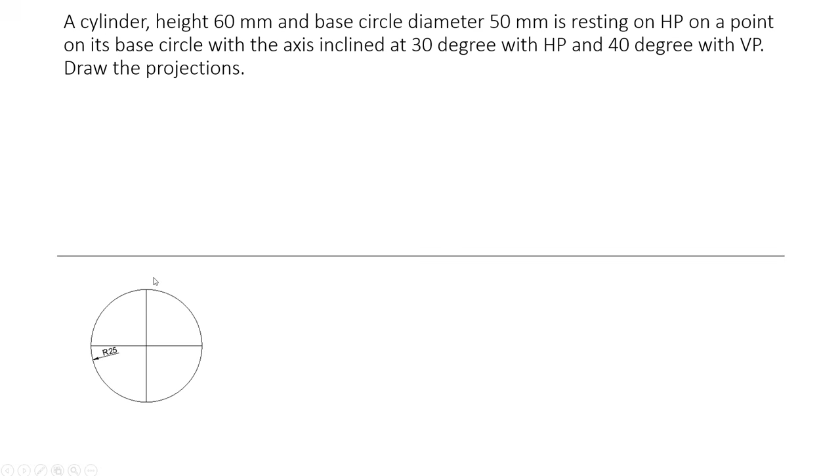So since it is a cylinder, the top of the cylinder is a circle. Draw the reference line, draw a circle of radius 25 mm. Do the dimension. Now draw the horizontal and vertical diameters parallel to and perpendicular to this reference line. Always these two lines should be parallel and perpendicular to this reference line.

Now you also want to draw lines at 45 degrees. So from here you just mark 45 degrees like this, and from all these horizontal and vertical lines, draw lines at 45 degrees so that you can divide the circle into 8 divisions.

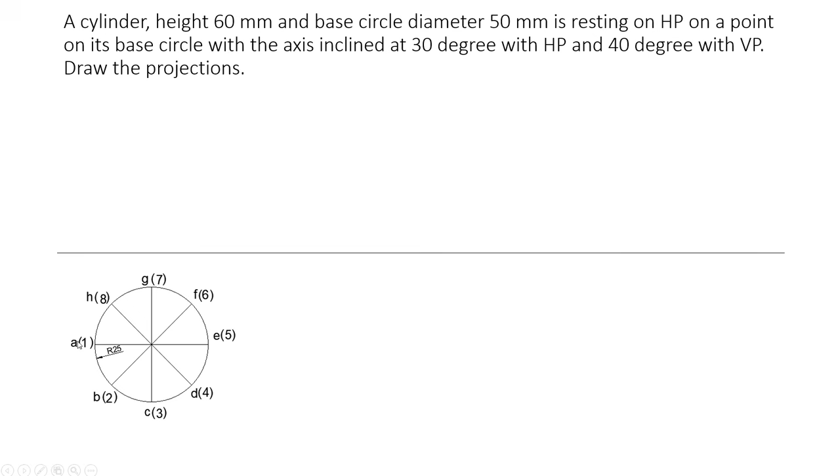Now name those points as A, B, C, D, E, F, G, H and 1, 2, 3, 4, 5, 6, 7 and 8. Here A, B, C, D, E, F, G, H, which are the points outside the bracket, are the top face points, and the points which are inside the bracket are the corresponding base points. Since those points are invisible in top view, those points are inside the bracket.

Now project all these points to the reference line. Since the height of the object is given as 60 mm, from here you mark 60 mm upwards. To show the axis you want to use chain line. Now from all these points projected here, just draw perpendicular lines to that 60 mm line.

Here do the dimension 60 mm. A, B, C, D are top points, so this will be the point A dash, and the second point will be B dash and H dash here, this is C dash and G dash, this is D dash and F dash here, and this point will be E dash. Now these points are outside bracket here.

Now to mark the base points you have to consider the points which are inside the bracket. So here it is 1 dash, this is 2 dash and 8 dash, this is 3 dash and 7 dash, 4 dash and 6 dash and 5 dash.

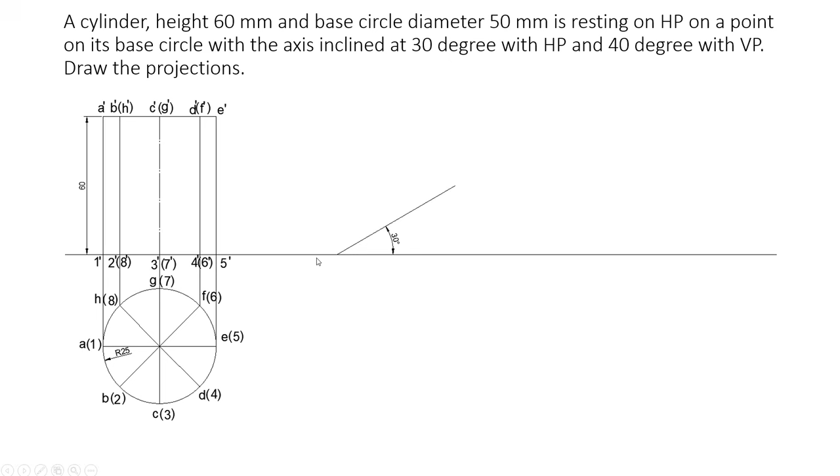Next, since it is given that the axis is inclined 30 degrees with horizontal plane, the axis and this slant generator are parallel, so inclination of the axis means inclination of this generator. So you can just mark a point here, and instead of marking the axis you can draw this line. Since the axis is inclined 30 degrees, this line is inclined 30 degrees.

So from here you mark a 30 degree line having a length of 60 mm. Mark a point and draw a line at 30 degrees having a length of 60 mm. Now also draw a perpendicular line to that line. Now parallel to this line you want to draw a line like this, and parallel to this line you want to draw a parallel line like this. So you'll get a box.

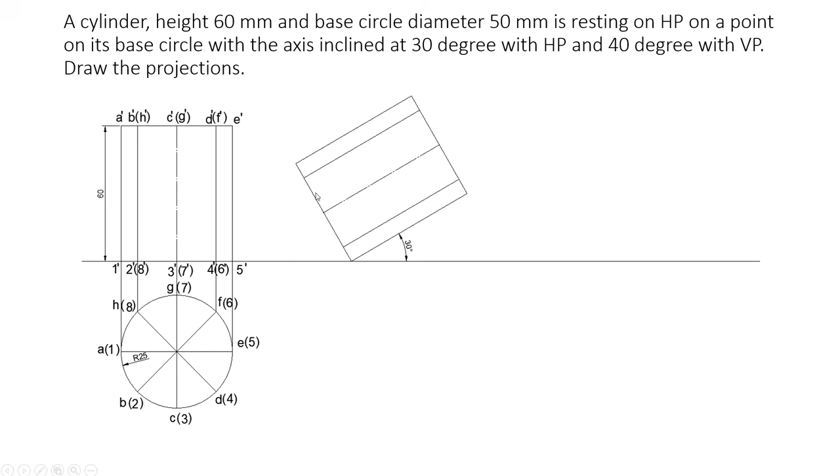Now you want to mark all these small dimensions from here to here, here to here, like that. All those dimensions you mark here. So you can get this axis and the remaining generators. Now all those points you want to name with the same name but with suffix 1. So 1 1 dash, 2 1 dash, etc. on the base points, and A1 dash, B1 dash, etc. on the top face points.

Now to get the fourth diagram, you want to draw the projection lines parallel to the axis through all these 8 points like this.

Now from all these points here you just draw vertical lines to the corresponding line. Here you have E1 dash, so E1 dash to E, then A1 dash to A, B1 dash to B, C1 dash to C, okay, D1 dash to D here, F1 dash to F. In that way you can get 8 points here.

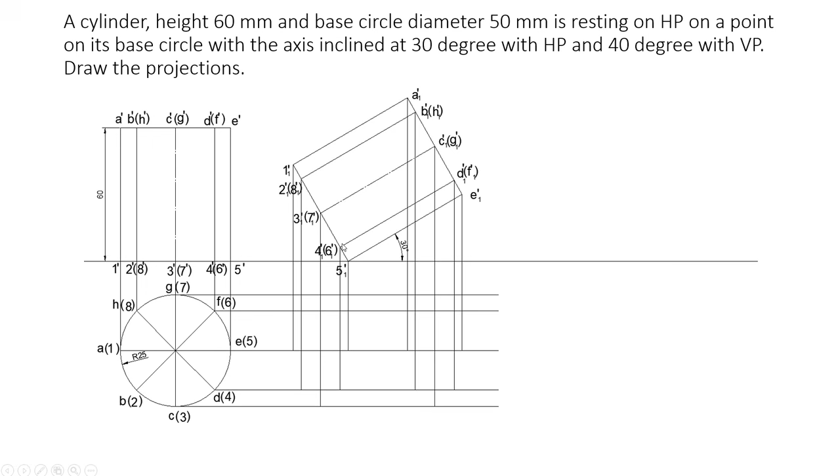Similarly here also you can get 8 points. 1 dash to 1, 2 dash to 2, 3 dash to 3, 4 dash to 4. So in that way you can get 8 points here. Now name those, just use a smooth curve to join all those points using a freehand smooth curve.

Here also you want to draw a smooth curve, but in this case the top point, the points which are here, you have outermost two tangents here like this. These two tangents, the portion of the curve coming inside that tangent, this much portion will be dotted line, because that half will be invisible in top view in this diagram. So this is the top view of this tilted diagram.

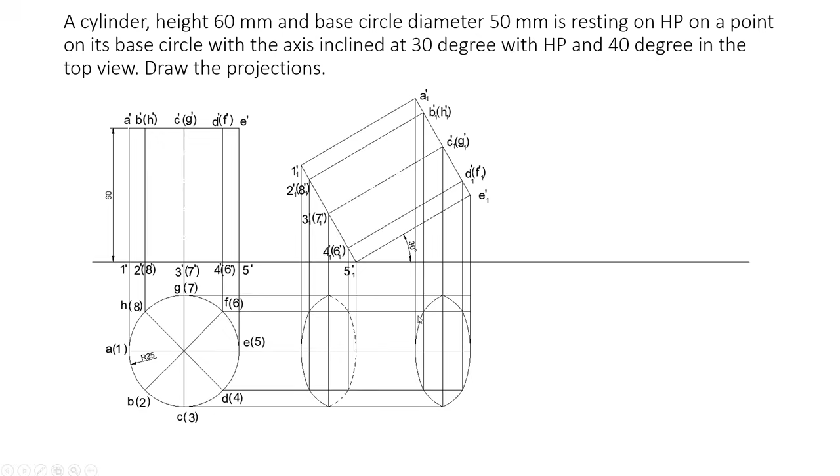So in that case, since it is tilted towards right side, some part of that cylinder will be invisible here. So that will be the portion which is coming in between these two tangents. So this portion will be dotted line. Now you just name those points 1, 2, 3 etc., and here A1, B1 etc. Now, so this is the fourth position.

Now it is given that the axis is inclined 40 degrees with the vertical plane. Now you mark a point here and draw a line at 40 degrees. On that line you mark a point here, and then you mark 60 mm like this. So here 40 degrees is the actual inclination of the line, actual inclination of the axis. But since it is already inclined with the horizontal plane, you want to find the apparent inclination here.

So to find the apparent inclination, first you mark the angle at 40 degrees like this. Mark a point, draw a line at 40 degrees. On that line you mark 60 mm. Then from there you keep some distance here, 3 or 4 centimeters, because the diagram should not cross this axis, and mark a point there. Then you draw 60 mm line like this, and through that 60 mm point, you draw a parallel line, the parallel locus of this end point.

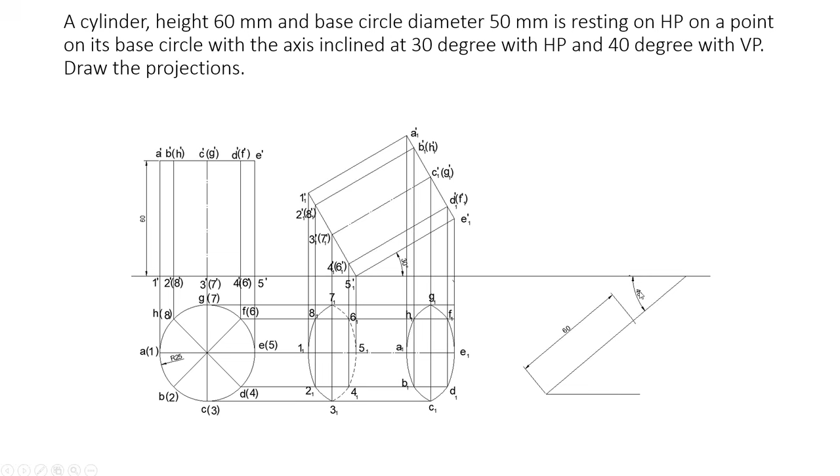Now here you measure the axis length. This diagram is to find the apparent inclination. Actual inclination of the axis with the vertical plane is 40 degrees. You want to find the apparent inclination. For that, after drawing this 60 mm line and its locus, you measure the actual axis length of this diagram. Here you can see axis length will be 52 mm. Distance between this point and this is the axis.

This line and this line you want to use chain line to show that it is an axis. So now you measure the length of the axis in fourth diagram. Here you can see it is 52 mm. So from this point, you mark 52 mm to this locus. So mark there 52 mm and also use a chain line to represent that.

Now you are going to copy this diagram here in such a way that this axis is inclined at this angle. Now on measurement, the actual inclination was 40 degrees, but this new apparent inclination you are getting is 48 degrees. So this diagram you want to copy here at 48 degrees, not 40 degrees, because it's apparent inclination.

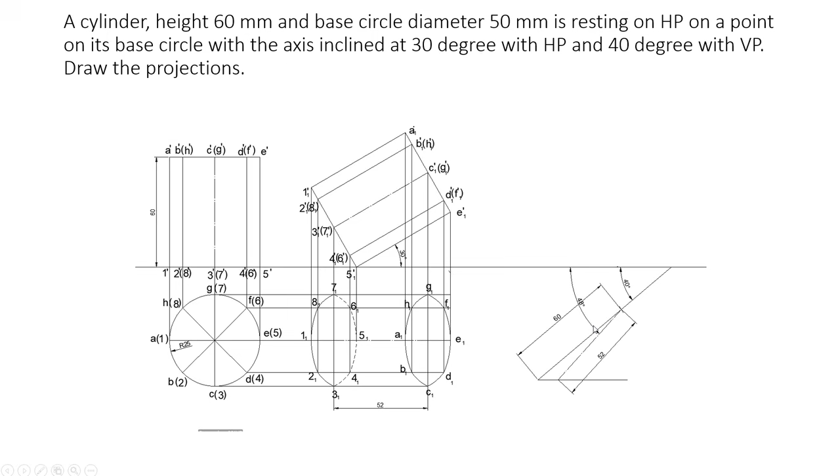Now to copy this diagram here, first from this center point, you mark this distance and this distance on this 48 degree line, not on 40 degrees line. Okay, you want to mark these dimensions on the apparent inclination, that is 48 degree line. So from here you measure this distance and this distance, and that distance you mark on this new line.

Similarly, other distances, this one and this one, to this side. So from here, this distance this side, and the remaining distance 1, 2, then this one here, and all these dimensions you mark on this new line.

Okay, these small dimensions, from here to here and here to here, you are marking. This is your reference point, center point, axis. So that is your point there. From there you are marking this and this distance towards that side, and other distances towards this side. Now you can get some points here.

Now on the second line you mark this distance and this distance from here, like this one and this one. Similarly, from the third point, this distance and this distance. So from here you mark that distance and the other distance here. Similarly, from the fourth point you mark this distance and this distance. So from the fourth point you mark that distance left and right.

Now the fifth point you need not draw because it's already a point there. Then the next point also you need not draw. From the next point you mark this distance and this distance towards the left hand side. So from this point you mark that distance left and right. Similarly, from here you mark this distance and this distance towards left and right, and one more point here, this one and this one towards left and right. From here you mark that distance on left and right.

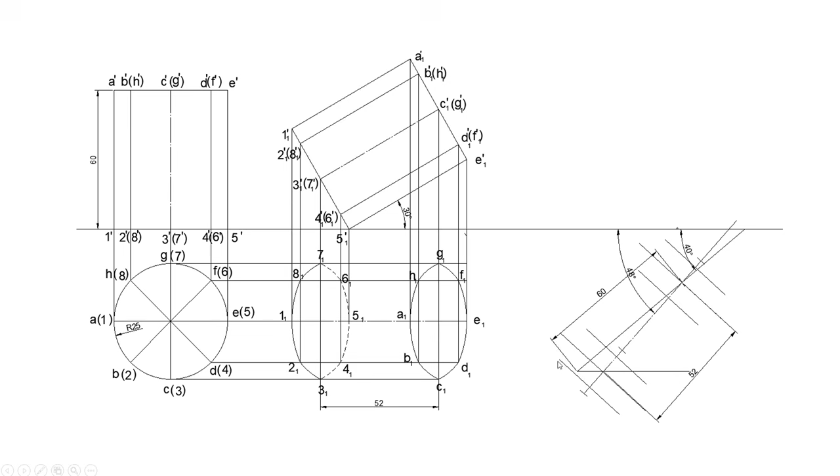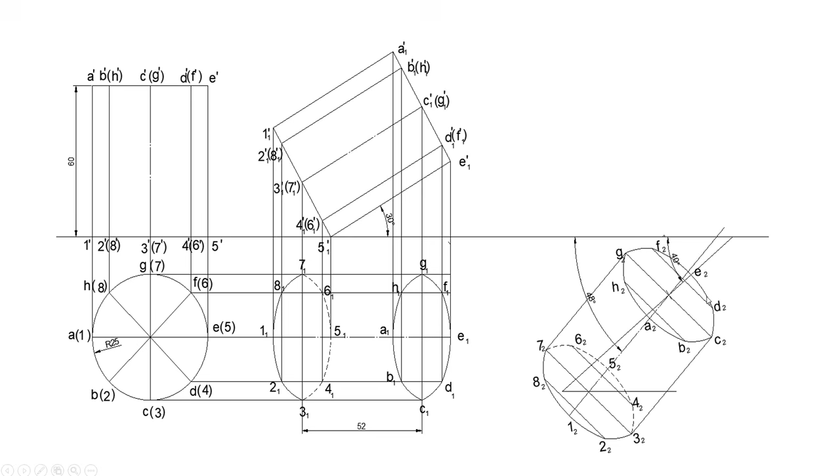Now use a smooth curve to connect all these points, similar to this one. But in this case also this much portion is coming as dotted line, so that portion should be dotted line. Now name all those points. This is your 1, so with suffix 2: 1 2, 2 2, etc., up to 8 2. Similarly this diagram also you name, this side also you name A2, B2, C2, etc., up to H2. Do the dimension 48 degrees also.

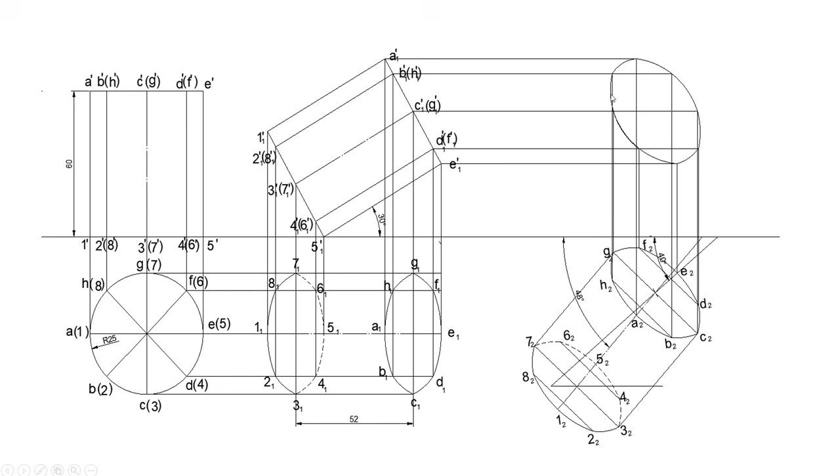Now to get the sixth diagram, you draw projection lines from here like this. From all these 8 points you draw projection lines, and from the corresponding points here you just draw vertical lines. So from A2 you want to draw a line to A1 dash, similarly B2 to B1 dash, C2 to C1 dash. In that way you can get 8 points here. Connect those points by using a smooth curve. Now in the same way name those points as A2, B2, C2, etc., up to H2.

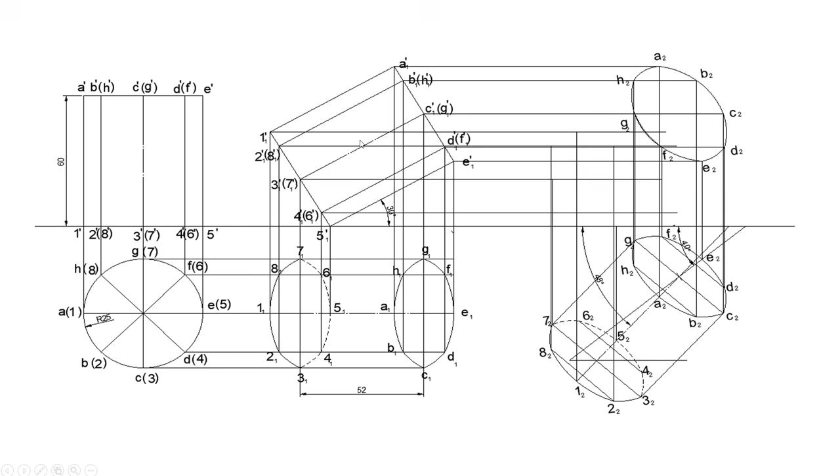Now in the same way you draw projection lines from the base points 1, 2, 3, 4 up to 8, parallel lines, and then you draw vertical lines from here also, 1 2 to 1 1 dash, 2 2 to 2 1 dash. In that way you can get 8 points here. Connect those points and use a smooth curve to join those points.

Here in this case you can get a diagram like this, a smooth curve here and a smooth curve here. But this is the front view of this diagram, so the observer is here. Since the observer is here, this face is visible, and the other face is away from him, facing the vertical plane. So the face which is facing the observer will be visible, whereas the face which is facing the vertical plane will be invisible, half of that will be invisible.

So this ellipse should be complete, using a continuous line, whereas this one, since it is facing towards VP, half of the ellipse which is coming inside this tangent will be dotted line. So in that way you can draw this ellipse and this ellipse, and here you want to use a tangent like this, from this curve to this curve here also. So in that way you can connect this diagram.

And also you want to use thin lines for representing these projection lines. Hope you understood this diagram, how to draw the projection of a solid when some apparent inclination is to be found.